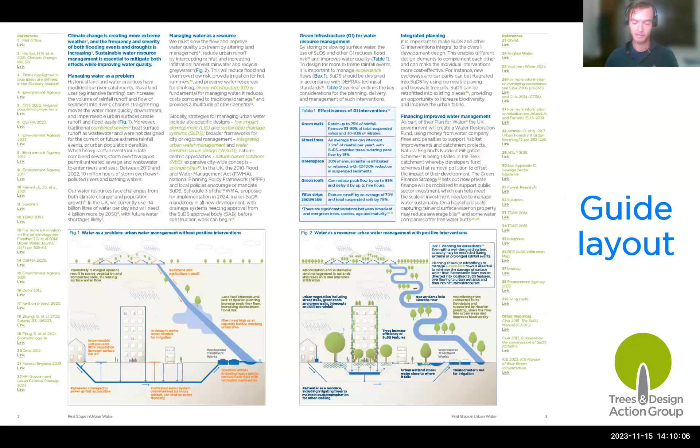But I've seen a change just in the last 10 years, and the changes have obviously been happening a lot further back than that: increase in summer droughts, resulting wildfires even in the uplands, and reduced crop yields as a result. Oh, sorry, didn't mean to change that one. The system is not so resilient to change.

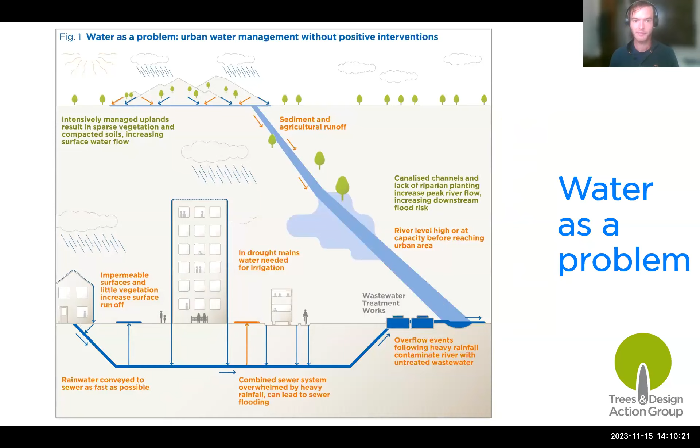So treating water as a problem this way also misses out on a key opportunity, which is utilizing water as the precious resource. So going into water as a resource. By taking an integrated approach to land management, both in urban areas and rural areas, and disaster planning, we can increase the resilience of our water supply in times of drought, decrease the risk and severity of flooding in times of heavy rainfall, and increase our supply of clean water for drinking and irrigation. And as we go on to see, a lot of the solutions can do all three of these in one go.

So in terms of the uplands, if you look at the top left of the diagram, where a lot of the rain is falling, afforestation and sustainable land management in the uplands can help water percolate into the soil, where it travels more slowly than surface water and provides the conditions for vegetation to prosper. So this is creating the first of our virtuous circles. Trees and shrubs are increasing groundwater by helping water percolate through the soil, stopping compaction, especially in clay soils, so helping more water go down.

This makes the soil more porous, and it also creates better conditions for more vegetation to prosper, and the cycle continues. So then in terms of drought, there's a lot more groundwater available to plants, so it increases the resilience. And in terms of heavy rainfall, more water is percolating down into the soil, so there's less overland surface water flow, so less water entering the rivers at one time.

So renaturalizing the streams and rivers further slows down this flow of water, and it allows, crucially, sediment to drop out. Increased sediment loads are a big cause of issues in biodiversity in waters.

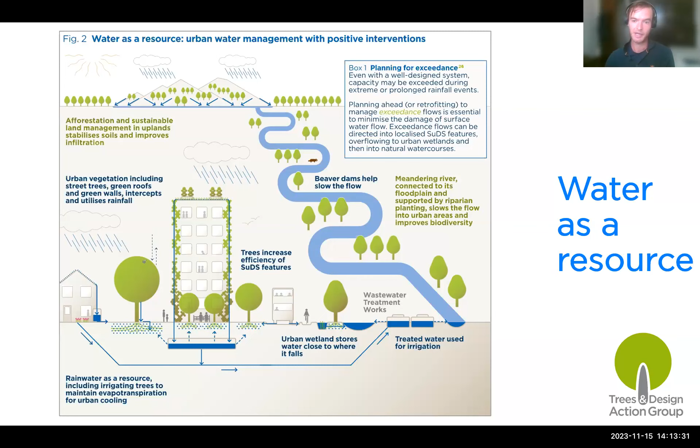So to break down into the key elements of things to consider to put these into action, we got it down to 7 main things to talk about. So number 1, treating water as a resource. So minimising the use of potable water by appropriate use of rainwater and filtered and treated grey water for things like irrigation. So we're really preserving the high quality water for high quality uses. And also not rushing to drain the water, considering how it can be utilised as close to source as possible.

Second one, small changes have a large effect. So although it's often easy to look at huge scale change in order to change our society, the other way up is going from a ground up approach, which is to do lots of small interventions, which add up to having a large effect. So the cumulative effects.

So this can involve, for instance, a sustainable drainage system might involve lots and lots of small elements, which add together into one big system, or it can just be lots of small interventions as close as possible to the sources of water issues, rather than, for instance, a huge dam at the bottom of a watershed. You could have lots of small interventions like leaky dams higher up. But I'll leave that for Amanda to talk about. I won't steal that.

Integrated water management. So a key approach of integrated water management is to bring together a range of experts, so not just water experts, but a range of planners, architects, everybody working in the planning system, because as we know, it's not just water experts who are making decisions on these things that are impacting our water supply. So overcoming siloed working is a key element of this. For example, linking urban water management with urban heat reduction.

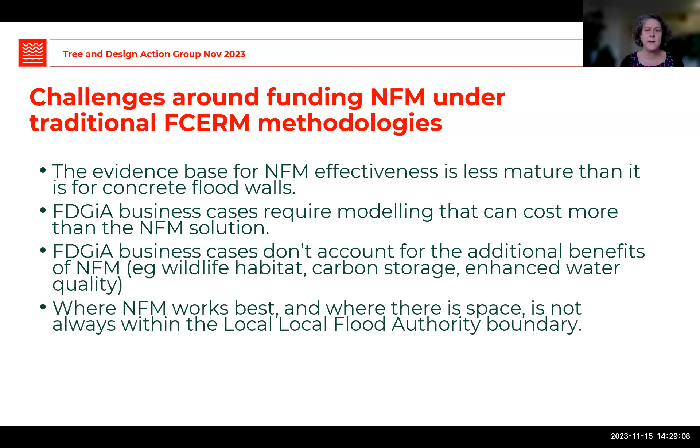The Flood Defence Grant in Aid Calculator also doesn't account for the additional non-flood risk benefits of NFM, such as wildlife habitat and water quality and so on. Local authorities also don't have a remit outside of their boundaries, so it can be difficult to find locations within their jurisdiction where they can implement an NFM scheme.

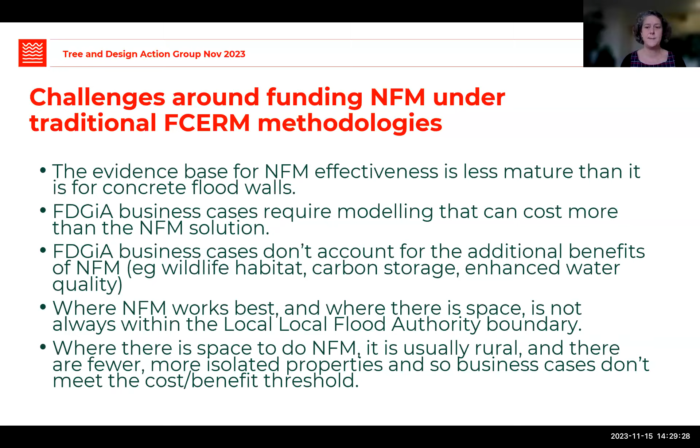And finally, NFM tends to work where there's space to do it, which tends to be in more rural locations. But in those places, there are fewer properties at risk, and therefore that cost benefit threshold can be more difficult to meet. So that makes it more difficult.

Oh, where have I gone to?

Yes. So DEFRA recognised all of those kinds of challenges, and in light of that, they set up an NFM pilot programme in 2017. And they funded 60 projects across England, and half of those were delivered by communities and charities, including Rivers Trusts and Wildlife Trusts and other ENGOs. And so YDRT delivered 3 of those projects as part of that pilot scheme.

And the photo here shows Bishopdale NFM. So this was working within the national park to install some scrapes. So these are shown in the photo here. They look like ponds, but these are actually normally empty or just have a small amount of water in. And then during a flood event, they fill up with water. And you can see that that's just immediately upstream of the farmhouse at risk down there. So this landowner was actually quite engaged with us and keen to work with us.

However, there can be a lot of hurdles to clear when you're developing and delivering an NFM scheme. For a start, it can take quite a long time to find a suitable location to do one in, and you then need to persuade both the community and the landowner to accept that intervention. Many people aren't very aware of what NFM is, so that can take some engagement and education.

It also requires changes to how land might have been managed for generations and result in a loss of income for farmers. There's no compensation offered for that, and there's normally no maintenance offered for NFM schemes either. And then working in a protected landscape brings its own kind of challenges, such as constraints on where you can do tree planting due to wading birds.

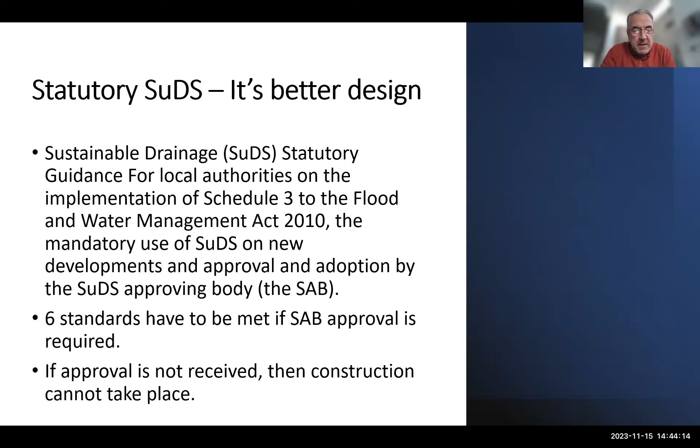So on January the 7th, 2019, we were the first country in the world to have statutory SuDS legislation to meet 6 statutory standards. And if you don't get approval from the SuDS approving body, or SAB, you can't build. So we've had that legislation for 5 years. Very strong, very puritan, runs parallel or independent with planning, and has been an interesting journey. Next slide, please.

I'll just go through briefly, just to break it down from the terminology, because sometimes we're guilty of using too much terminology in our industry and no one really understands what we're going on about. So when we're talking to decision makers and politicians, I try and thin it out so everyone can follow it. So I'm not patronising. The 6 standards are basically: where does it drain to, manage the flood risk, quality, which is water quality, deliver amenity, deliver biodiversity, and the 6th one, which is always a difficult one, who owns it, who adopts it, and who maintains it. Those are the 6 standards.

You have to pass all those in an application, a technical application, and if you don't get approval, you cannot build. There's no way around it. Very difficult to appeal against. So it's very powerful legislation, in my opinion, probably the strongest legislation that's been passed since devolution. I argue that with colleagues in work, but I think it is, personally. Next slide, please.

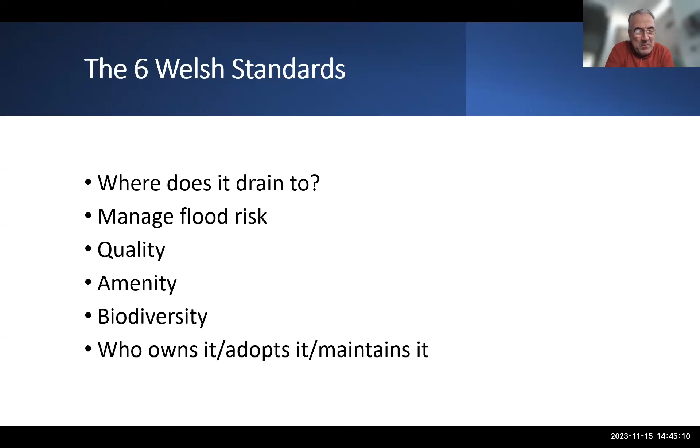The key challenges. Hopefully, DEFRA through Westminster are going to deliver Schedule 3, an English version of it, next year before the election. It's going to be very tight for them, but we're trying to support our colleagues in DEFRA from the Welsh Government as much as we can. The 4 main challenges: first, trained technical staff. There is a huge shortage of people with knowledge of the drainage industry, landscaping, architecture, elements of this. There's a generational shortage across the UK. So it's really challenging to bring in such new legislation when there's a shortage of staff. What we're trying to do is to pass on the lessons that we've learned in Wales to our colleagues in England, so they don't trip over these things as the legislation commences.

The second one is collaboration with planning. Where they set the SuDS approving body in England is yet to be fully decided, but the relationship with the planning authority is so important. They need to work very closely together from the very start of the scheme. At the end of the day, this is about making surface water designed at the start rather than the end of a project. So that collaboration is really important.

Manageable maintenance. Maintenance has been mentioned over the chat. As a drainage engineer, if something is designed with high maintenance, it will not be maintained. That's the reality of the industry. So you really have to design the maintenance to a low and manageable amount, and preferably a visible amount. If it's got a cover on top of it, it's probably not going to be maintained. If you can't see it, it's not a problem. I'm afraid you have to design for human nature as much as you have to do with hydraulics, with sustainable drainage.

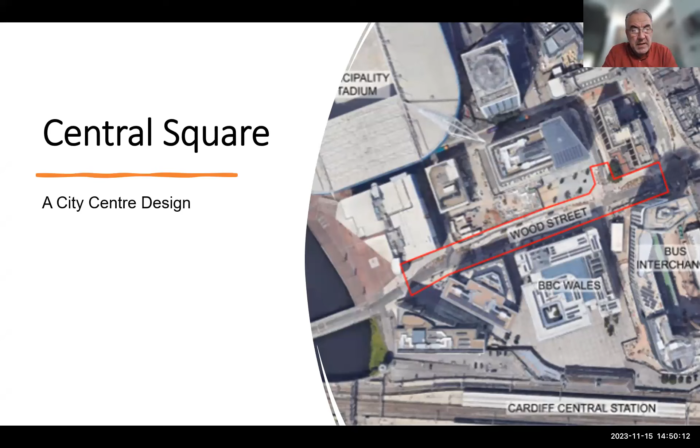Again, this is what it used to look like, very grey roads. It's very busy on the weekends. This is when you've got an event in the rugby stadium. And as you can see, it is spaghetti junction in terms of services. It's got absolutely everything in there. And yet, with this particular scheme, you can flick on to the next one, we engineered and designed around it. We worked very closely with the highways engineers to make sure they were happy with the systems we used.

These particular ones are GreenBlue Urban soil cell systems, giving 10 to 12 cubic meters of soil per urban tree. We've done a lot of work on urban tree design in the city centre. They're not cheap. You put fewer in and get better quality and greater longevity. I'm not a fan of sticking a twig in a footpath, sticking a little plug in with it and expecting it to grow. We need to design properly for long-term green in our urban environment to give these trees longevity, a good lifespan, pick the right species, give the right location. It's all very, very important to get this right.

And in the bottom right, you can see the completed scheme where there were 6 elliptical rain gardens on the north side of the street to catch the runoff from the highway, from the footpath, from the cycleways. And on the southern side, there's 13 soil cell systems where we didn't have room to put rain gardens in. So we put in below ground soil systems. We took about 8,000 square meters of runoff out of the combined network, cleansed it through the soil and the vegetation, let grass and gravity do all the work, and put it in the culvert and plonked it in the River Taff, the other side of the road.

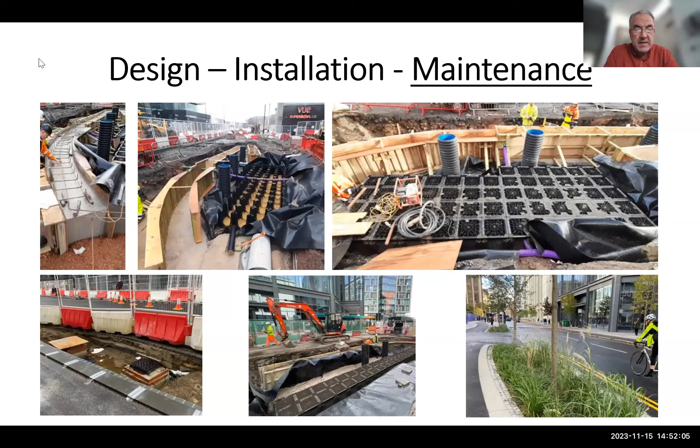This is a residential example that we finished about 5 years ago, another retrofit, Greener Grangetown. When you retrofit, you consult and you consult and you consult. It's so important to talk to residents and talk to businesses. If you don't talk to them, you don't get a good design. Very, very important. Next slide, please.

This is a particular area in Grangetown. It's the Dockland area, Cardiff. It's not the usual suburban area you often see retrofit in. Portland, Oregon is always the one they use as an example. These are inner city streets, many Victorian streets, Victorian houses, high density, very multi-ethnic community.

And we removed 42,000 square meters of runoff, which is equivalent to the rainfall of Cardiff, about 42 million litres a year from the combined network, which was travelling 8 miles through 3 pumping stations to get tertiary treatment when it was 30 yards from the river. So grass, gravity and rain gardens are doing all the work. Nothing mechanical, it's just Mother Nature doing the work and doing a much better job.

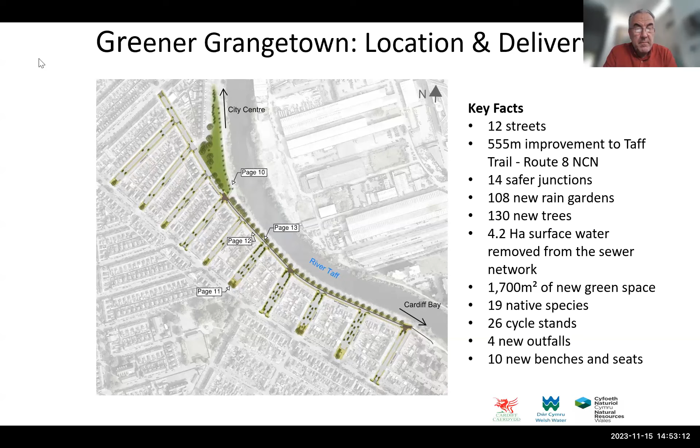Next one, please. Again, these are the challenges: parking, parking and more parking. Existing trees, we didn't chop them down, we engineered around them. And it was so important to keep the canopy you've got and add to the canopy you've got. It's not the time in the human race's time to start chopping trees down. We need to keep what we've got, make sure they're healthy trees and add to those canopies.

And the cycle route on the right, we improved the cycle routes, we improved pedestrians. I don't think in the scheme there's been a road traffic accident since it was completed 5 years ago, because it's been designed for multi-benefits. That includes people walking, people cycling. It's a residential area with cars, it's not a car park. Next slide, please.

Again, I talked about consultation, involving the community and also giving them options. We gave them options on designs, we gave them options on vegetation, on tree species. We even showed what they look like at different seasons, so you could have a choice of colour, choice of design. But at the end of the day, this vegetation and trees are designed for dry soil, rain gardens, most of the time bone dry, and also designed for the climate.

They match local fauna and flora, and also they're pollutant tolerant. So you choose plants specific for the purpose, so their maintenance is also low because they grow very slow, so keep the maintenance down. This was the 6th design on this street before the locals were happy.

They weren't very happy with the street. I should say that because I actually live in this street. Never live where you retrofit. A lesson for everyone there. Next slide, please.

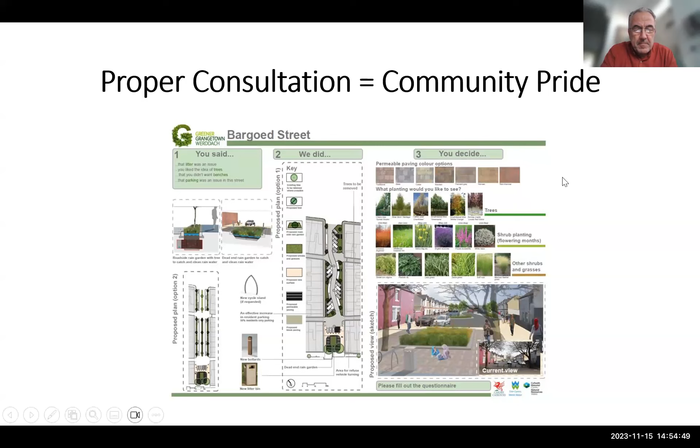And it really means a lot to the community to be involved, because as public sector funding gets tighter and tighter for all organisations for various reasons, using the community to be involved in maintenance as well, as long as the health and safety and insurance is done, is something I think is very important. But you can only do that if you involve them in a retrofit, in the design and in the installation. They take pride. It's almost like their front garden. They take pride in it.

And I think that link with the community and SUDS, particularly retrofit SUDS, is very important. And when Ofwat talks about nature-based solutions to remove water from the system, that is retrofit SUDS. That's exactly what they're referring to. Next slide, please.